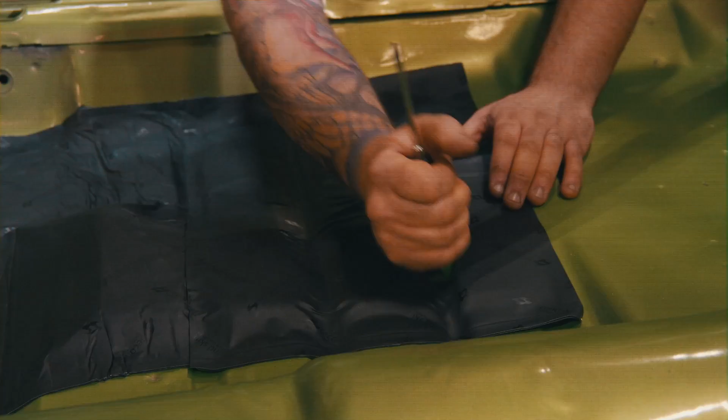With so many areas of the shop, it's been nice to watch the growth of the employees. We've really got a great team right now. Even though it takes a little bit to tune them up and get them thinking, once you do take that time, they know how important it is to me. So it's relaxing for me, and it's a peace of mind to know they're doing their job. That's going to help me get the cars done faster, which is going to make my clients happier and make us more efficient.

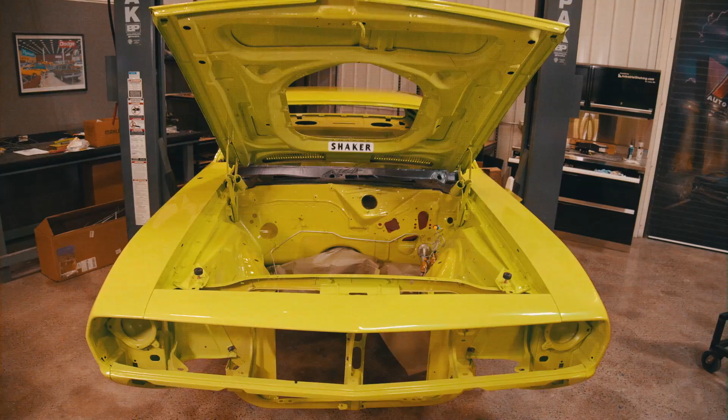On this episode, to compare the Barracuda Tribute with a real car, we've got our 1969 and a half Super Bee. One of the things this car requires is the accuracy and authenticity of Mopar.

They're coming to get you, Barbara. In Springfield, Oregon, dead Mopar muscle cars are coming back to life. Restored by Mopar master Mark Worman. I'm a liar and a fat mouth. His daughter, Alyssa Rose. Why would you do that? His painter, Will Scott. Got one dog. And his cousin, Dougie. Oh, hi, Mark.

Welcome back to Graveyard Carz.

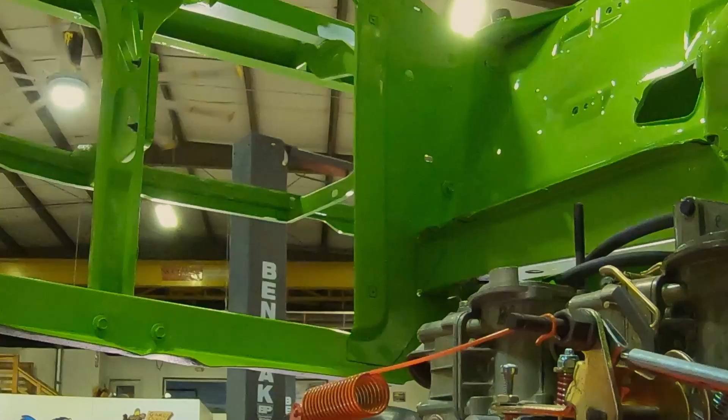In our 1970 Plymouth Barracuda Tribute car, we've already installed the drivetrain. I took some time before the drivetrain got installed to go over the specific details of what steps we go to make even a Tribute car look accurate to what a real BS23 V-code car would be. This is a 1970 440 six-pack HP engine with a Silver Sport 6-speed transmission and a Dana Moser rear axle. This engine is going in a '70 Cuda Tribute car.

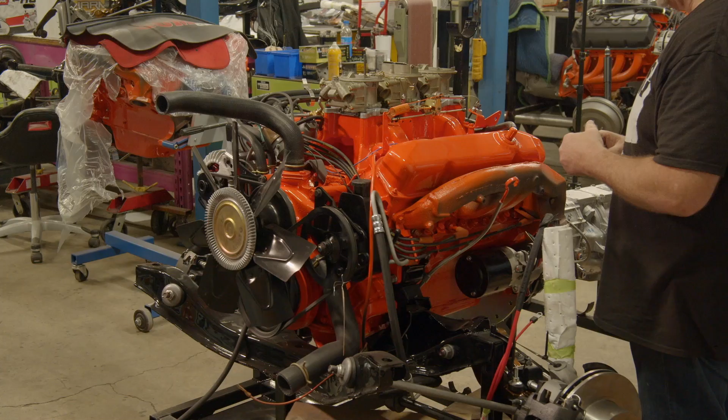This is a Graveyard Dreams car. People ask, if you're doing a Tribute car and it's not a real V-code car, how authentic do you get? How detailed do you get? How close do you really want it to be? Are you trying to fool anybody? Well, the answer is yes, I am trying to fool a lot of people, but not for any monetary advantage. The VIN in the windshield is going to tell you that this car started life as a 318. The fender tag is going to confirm that it's a 318. Everything else about the car is going to look like a '70 Cuda with a 440 six-barrel.

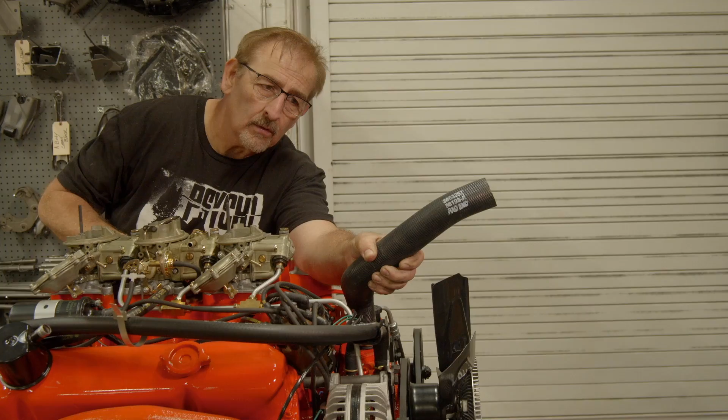So just to talk about that, upper radiator hose - that has the original part number, also the original texture, but not the one you get at your local parts store. This is a duplicate of the original. These are replicas of the spark plug wires with the date code on it. Original torsion clamps on the hoses, the 216 fan, which my friend Tony D'Agostino reproduces, and the date-coded clutch fan, which Tony also happens to make.

If you look at that right there, you'll see that there is a part number. Those are replicas of the original fan and power steering belts. That's the detail we go to. You open the hood, I don't want you to see anything except the way it should have started life if it was that particular car.

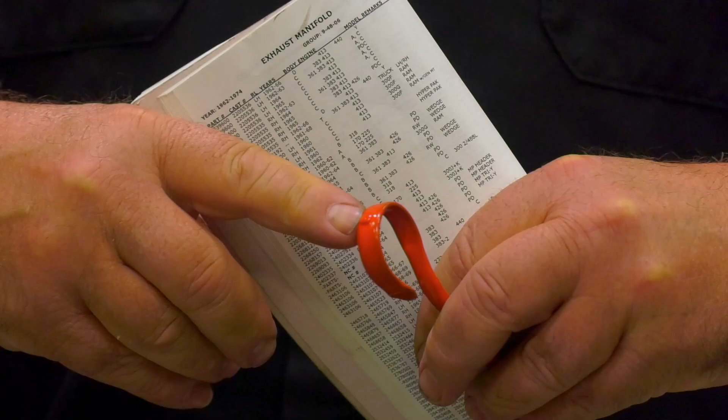You'll see that we use the natural finish on the dipstick tube with the painted dip. See a nice little dot right there? That means that's been dipped. PCV valve and grommet both get painted with the engine in Hemi orange. This is a correct throttle return bracket, throttle return spring, and throttle bracket for the 440 six-barrel manual transmission. Replica Holley 2-barrel carburetors with the correct screws.

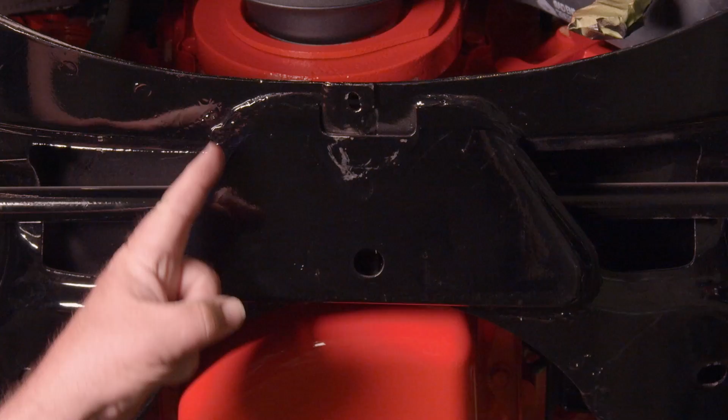They come with an 8mm hex head screw, the new reproductions. We get these from Classic Industries and replace them before we put the carburetors on. We have the lead here going to the six-pack idle stop, which I don't have yet - it's coming. You look at the K-member, that's an original K-member with the skid plate. The lower control arms have the simulated Cosmoline effect that we put on all of them.

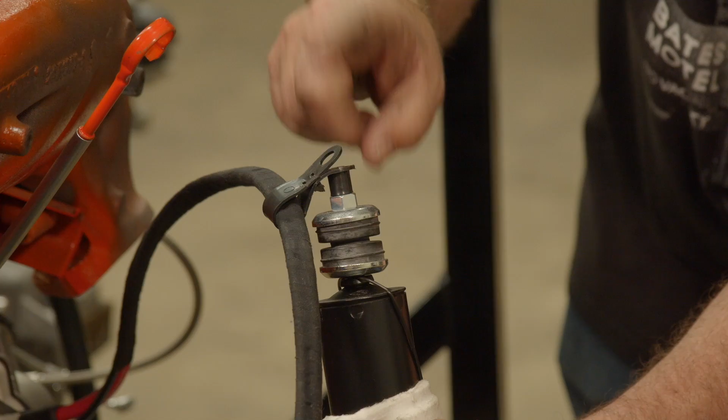Disc brakes, correct for a Super Track Pack car. This is going to have a 4:10 in it. It would be an A34 Super Track Pack. Replicas of the original black shocks with hardware, including the clip that holds a positive battery cable to the upper shock mounting bolt on the left-hand side of the car. Here you see an original sending unit for the rally instrument cluster. This is the correct original 6-barrel throttle cables that go on a '70 E-body with a 6-barrel on it.

The same thing applies on this half of the engine as it did on the other half. That is correct, original appearing—that's the name of the game. Whether your car's a G code for a 318 or a V code for a 440 6-barrel, when you pop that hood, if you're calling it a Tribute, or a clone like they used to call it, try to make it as accurate as possible. I guarantee you it's not a waste of money or time.

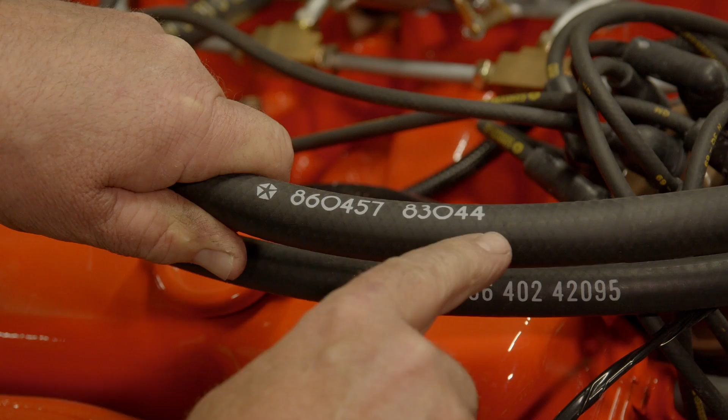Over here you see the heater hoses with the correct part numbers on them for the 1970 440 engine in a non-air conditioning E-body. Here on the coil you see it's got the original part number, the original color stamping, and the date code.

Original Gates hoses—this is the 11/32 black hose with the yellow writing on it. This one goes over to the PCV valve. This one right here goes over to the power brake booster. Because this car is a power disc brake car, we have to have that line going to it.

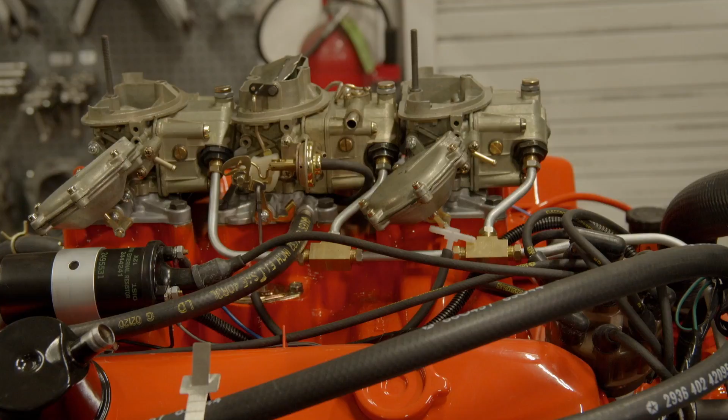From our friends at Inline Tube, these are the replicas of the original upper fuel lines that go into the 6-barrel carburetors. You could link it together any way you want, but if you want it to be right, that's the part you need on there.

Looking down here, you'll see the KV fuel line. This is the main incoming line, 3/8. The outgoing one is 5/16, but it also has KV on it. And this is the 1/4-inch fuel return line, and it goes back to the fuel tank. Then this is the fuel vapor separator.

So when you look at this engine, everything about it from a DNA standpoint is accurate for a 1970 Cuda 440 6-barrel. Originally, this engine would have had an 18-spline Hemi 4-speed behind it.

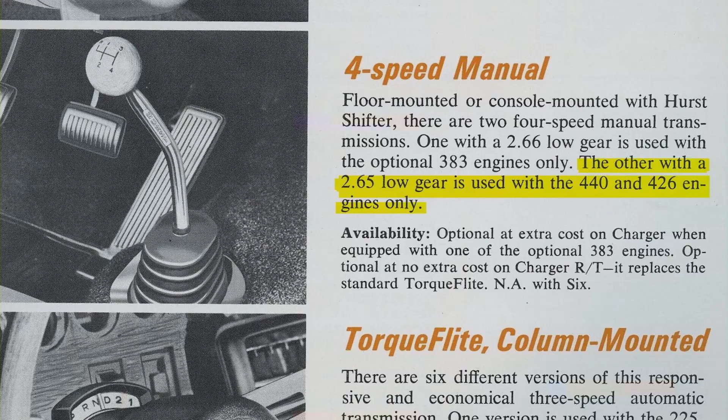Now, you've probably seen the transmission back here. The cool thing about the transmission is this is from Silver Sport—it's a 6-speed T56 Magnum transmission. You can buy this whole thing in a kit: scatter shield, clutch, flywheel, transmission, and you get the shifter.

Here's the coolest part of this particular transmission. Number one, it bolts right into your car—very few modifications to the floor. You do have to cut out a couple of small areas to be able to fit this transmission in there. We'll show you that when the time comes.

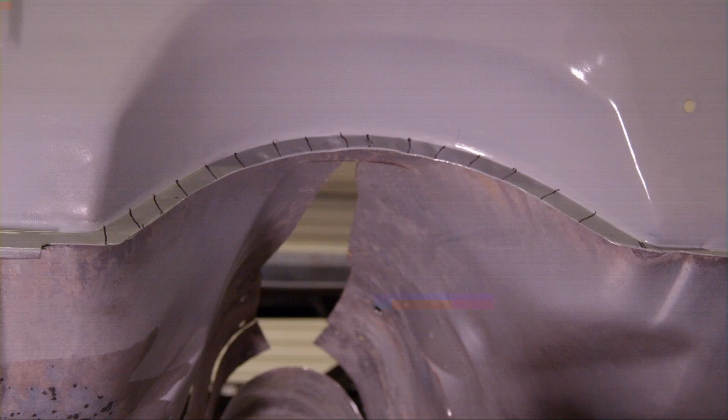It's this. This is the gold. Gold, Jerry, gold.

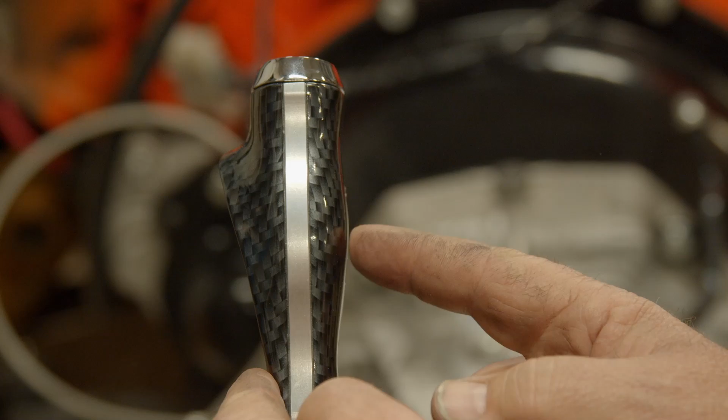Originally it had a pistol grip 4-speed with wood grain handles on it and a lens indicator on the top that would have a 4-speed pattern. This comes out exactly in the same position that a factory E-body 4-speed would come out—no modifications back there at all. They've modified its shifting area from here all the way back to here and off to the left because Mopars are off center. They've included carbon fiber, which isn't my cup of tea, but the folks that own the car happen to love it.

It's the lens on the top that I think is so cool—the same font, the same pattern, except that it's 6-speed.

So I grab that bad boy. First, look at the throw. Second, typically it's more like this—this is about 50% shorter throw. First, second, go into third, fourth, fifth, sixth. And then back to the neutral gate, over to the right and up is reverse.

That's just gonna make one nice driving car. So there you go—440 6-barrel Tribute with a 6-speed transmission, done the way Graveyard Carz does everything, the right way.

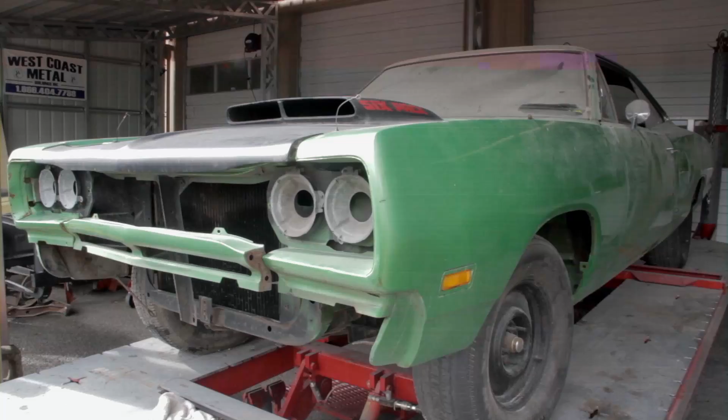So to compare the Barracuda Tribute with a real car, we've got our 1969.5 Super Bee. Now this car's been around a long time, and I'm sorry to say that. We've moved a couple of times, got a lot of things happen. The owner's been very patient with us, but it doesn't avoid the fact that we've had the car way too long, and it's time to finish it.

Connecting with ACC has allowed me to be able to get carpet sets for our cars. We were always able to get them, but the ones we're getting from them come in a great big flat box—this thing is not folded up. In this particular case, you open it up out of the box, you lay it in there, you use a quick steam across it just to make sure you hit all the contours, and all of a sudden you've got a factory OEM identical carpet set to what you had if you would have bought the car brand new.

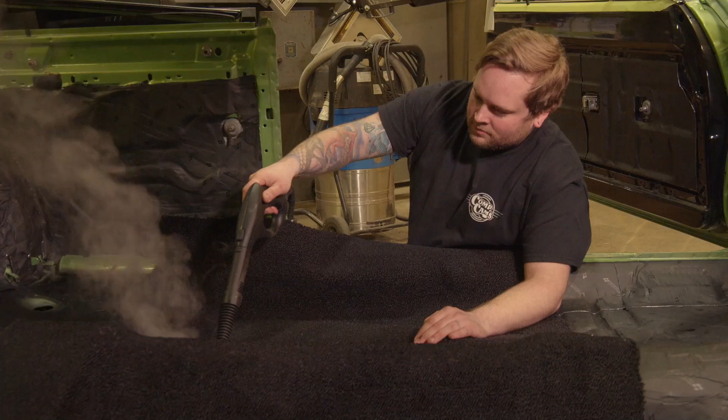They make these carpet sets a little bit long, which is smart, because sometimes you have to trim the end off, put it in there, and find out it's still too long, so you can keep trimming it. It's like hair - if you get a bad haircut, it's difficult to glue that hair back on.

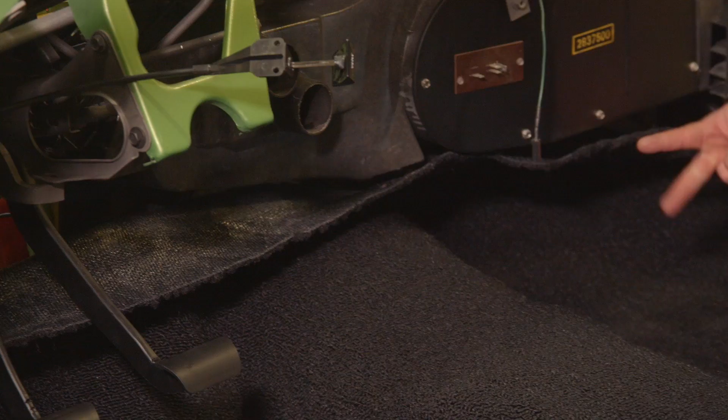You cut a board too short, you can't glue the wood back on. So in this case, they give you plenty and you just take your time and trim it. Between trimming it, steaming it, and fitting it, you should be able to make it look exactly the way it did, or better, when the car was new.

One of the most difficult cuts you need to make sure is perfectly lined up is actually where the shift mechanism comes through. You got to get that right because it's right in the center and nothing really covers that. You only get maybe about 1 inch of grace when cutting that for the shift boot to go over, but if you go anything further past that, you're calling them up and asking for a new carpet.

The carpet looks fantastic in there. Made all the cuts, got everything lined up, lays down super flat, and I just can't wait to move on to the next part.

So now that I got the carpet in, we can move on to the rest of the interior. We can actually get the dash in there, get the trim panels on the door, hopefully get some seats in there.

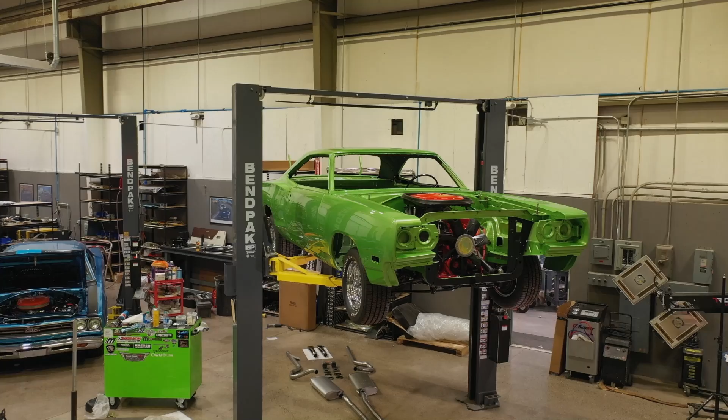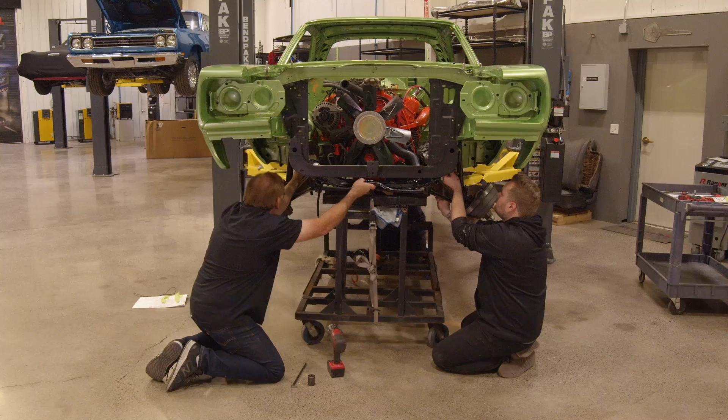We are getting ready to install the OEM exhaust system on our 69.5 A12 car. If you go back to the early seasons of Graveyard Carz, I did an inventory check on this car. We went around it from the very front to the very back, talking about the things that make it a real A12 car, some of the footprints we needed to record, so for times like this when we're putting it back together, we would have that documentation. It's a very unique package car and it deserves to be done right.

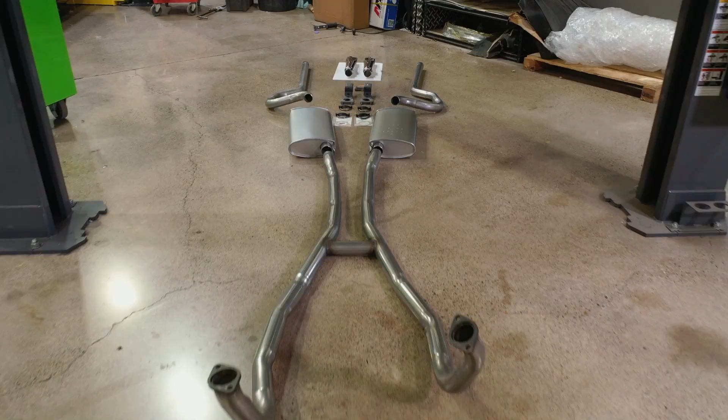So we reached out to ECS, the company that makes our decal kit. The exhaust system is what I fell in love with when I first saw them at SEMA a couple years ago. We've had discussions about the difference between the real righteous ones and the ones that are fine and affordable in other cases - but if you want a really righteous car, what makes this right? After learning that, I've decided to use those systems on our cars from here on out.

It's a nice looking pipe, right? Yeah. The ones we've used in the past, the cold rolled steel, which is the factory ones, they're also a nice looking pipe - right up to the point where you run them a few times and they get wet and they rust. So this system looks and appears completely OEM from the finish standpoint, but it's actually made of stainless steel.

The main thing that I think is so sexy on this system are all these bends - how they've made all of the duplicated exact bends where they're supposed to go. But the interesting part is the things they added that are cosmetic so it would appear OEM. So if you flip it over, first off, you see this seam? That's a factory weld seam, all the way down the pipe, just like the original cold rolled steel ones.

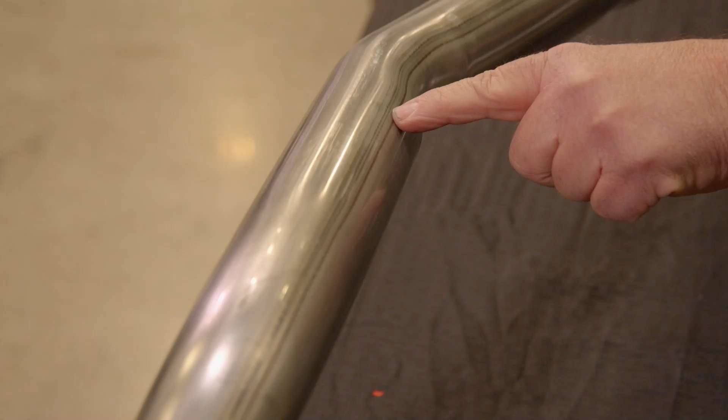Aluminized ones don't have that. So if you're doing an original one, you definitely want to make sure you have that seam so it looks right. Now this is the cool part - this flat spot you see on both sides, this is where it goes underneath the torsion bar cross member for clearance. Another key thing you don't see on a lot of systems is this flat spot right here - you know how the torsion bar comes right here, and on a lot of systems, this comes over, it doesn't have the sink in it, and so it'll hit that.

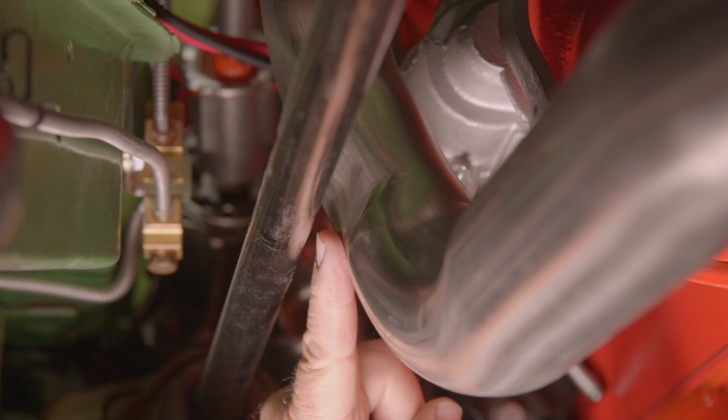The way the engine works on torque, you put it in gear and drop the clutch, it wants to walk up on the left, so it'll walk right up and smack into the torsion bar. This gives you an extra, probably almost an inch. So that line right there is 100% factory. That's really nice to have. Oh, it's great. It looks right and it actually serves the purpose.

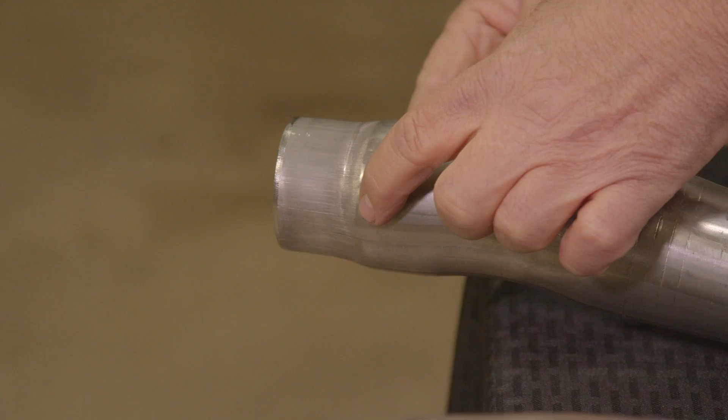You see these shoe marks right through here? These are all factory, even the factory ones have it from clamping it in the machine. The shank down, the really nice collapsed shank right there for the mufflers to go on. It's not cut or split or reduced, just pokey down. It's a factory system. It's just beautiful.

Yeah, let's put it in. Let's do it. So while we have used good exhaust systems in the past that work great, they're not licensed by Chrysler. They're not accurate enough to an original one that you could get a license and put a Pentastar on it. But on a car like that, that's why it's going on this one, and that's what that car deserves.

1966 was the first year for the Dodge Charger. Now originally, this car was supposed to be a turbine car. The turbine engine project failed, so the turbine Charger failed along with it. However, it was a great looking car, a great design, and Chrysler had a lot of money invested in it.

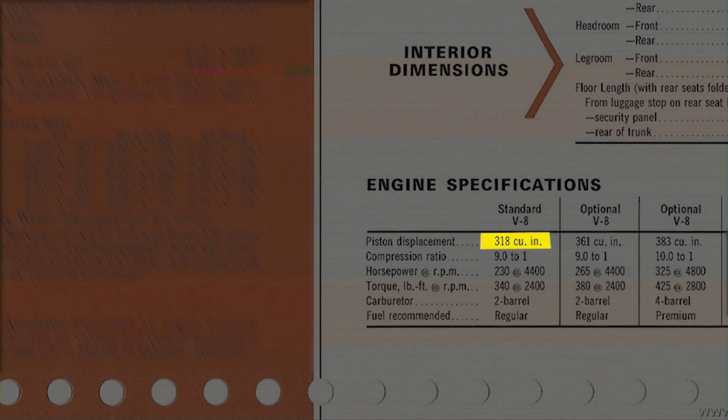They decided to continue to produce it with a conventional engine. The standard engine, the '66 Charger, was a 318. Optionally, you could get the 361 two-barrel, which also happened to be the last year for the 361. The 383 four-barrel was also optional in the '66 Charger. What other engine could you have gotten in this car? Was it the 440 Magnum, the 426 Hemi, or the 440 Six Pack? Think you know that answer? Stay tuned after the commercial break and we'll let you know how you did.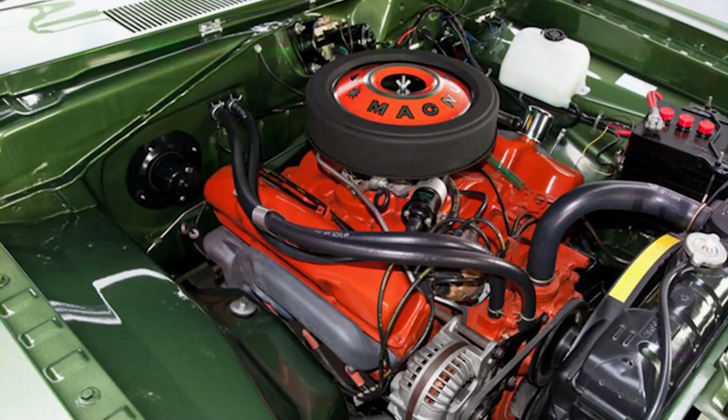The very first year for the Dodge Charger is 1966, like this one right here. The standard engine was a 318, we learned that. The 361 two-barrel was available in this year and model, as was the 383 four-barrel. What was the other engine available in this model? Was it the 440 Magnum, 426 Hemi, or 440 Six Pack? If you guessed 440 Six Pack, you're crazy. You're wrong and you're crazy, because 1969 and a half was the very first year for the A12 cars with the 440 Six Pack, 390 horsepower, 3 Holley two-barrel carburetors totaling 1,350 CFM.

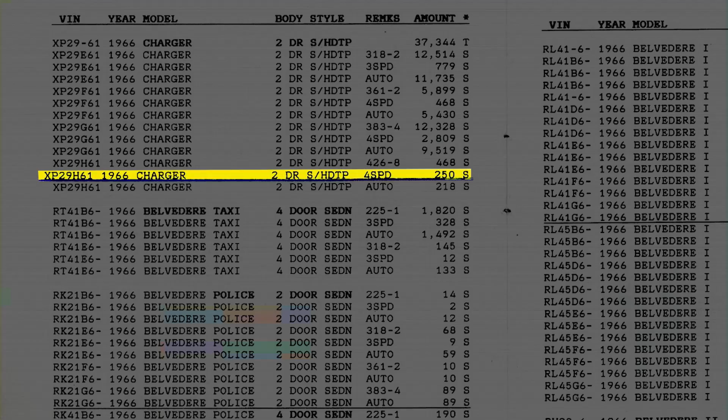If you said 426 Hemi, that was the other available engine. They only built 468 426 Hemi 1966 Dodge Chargers. Of those, like this one being a 4-speed, they made 250, only 218 automatics. So I can keep doing the number thing all day long, doesn't matter to me.

I got nothing but numbers rolling around. You see that movie, A Beautiful Mind, where the guy's standing in front of the board and all the numbers are going off and he's calculating it all? That's every day of my life. Like Terminator, the numbers are jumping up and down looking for matches. Now, the guy in Beautiful Mind, he had a nervous breakdown or something, right? I haven't had a nervous breakdown.

Okay, so we're ready to put the mufflers on. That means a little bit of hardware. Now, you've seen the other clamps that we used to use, they'd have a flange nut where the washer was built onto it, which works great, but it isn't correct. This is actually the correct setup for the hardware.

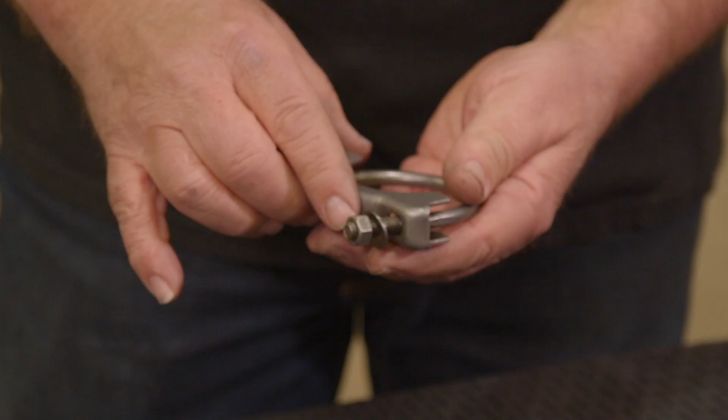Correct size, correct finish. You see they're oily? They're a natural finish from the factory. The ones that we get are zinc plated a lot of times, and that's not correct. This is actually correct, but they put the oil on to prevent it from rusting. These are what I'm in love with, natural finish, that's why they're oily. The correct band too, I believe a correct rubber band with the double sewing in it.

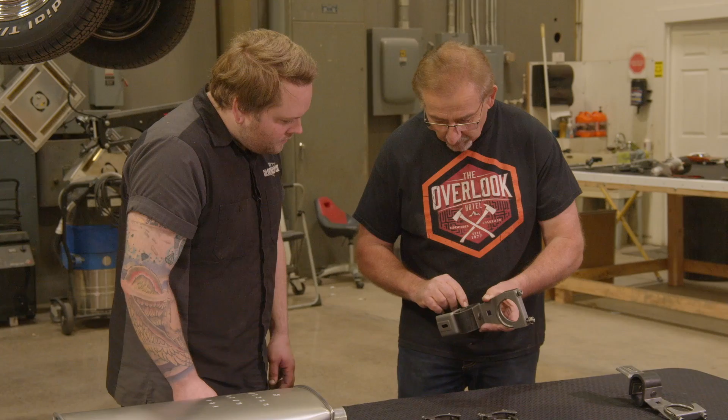But that stud, go look at an original one, that hollow rivet, that's all factory, where the generic ones that you get don't have any of that. I think it's just bolted on the generic ones. And see how this is stamped into it? Normally this is just flush and you bolt it on there. This is as close to an NOS part as you could get, just doesn't have a part number on it.

Nice, and then the mufflers, super cool. So these are double wrap. You've got your outer skin, and they actually have another skin underneath it.

That's what gives them the Hemi muffler deepness. You notice how a lot of mufflers we put on sound more tinny, like the MagnaFlow - great sound, but it's not a factory sound. This will offer you the factory sound.

These are the only ones licensed by Chrysler. That's why you only see the Pentastar stamp on these. So if you want to do it, you do it like that.

So you've got your vendor code, your date code. This would be the 27th day of '69, which is great because this is a spring car, so this is plenty - this is 2-3 months before the car was built.

Another vendor code, which internally means something to the people that made them originally. But these are built based on original. And the font - that's the other thing - that is identical.

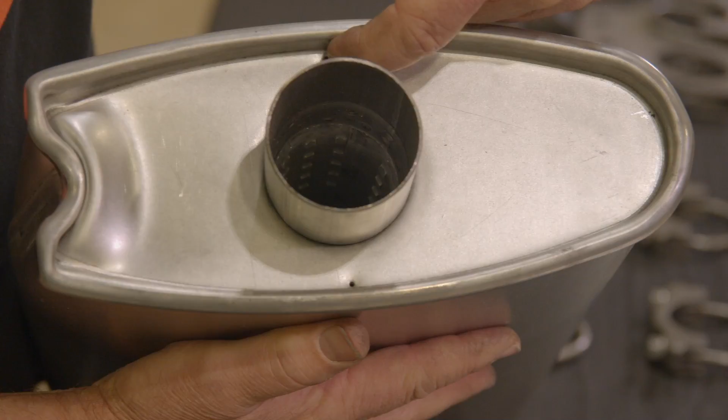But here's something nobody pays attention to - the aftermarket ones have one weep hole. This has two. That muffler is not specific to either side of the car.

So it could set this way, and it has to set a certain way on the left-hand side of the car. You could take that same muffler, flip it over, and put it on the other side. That's how it's intended to be - it's just that attention to detail is so important.

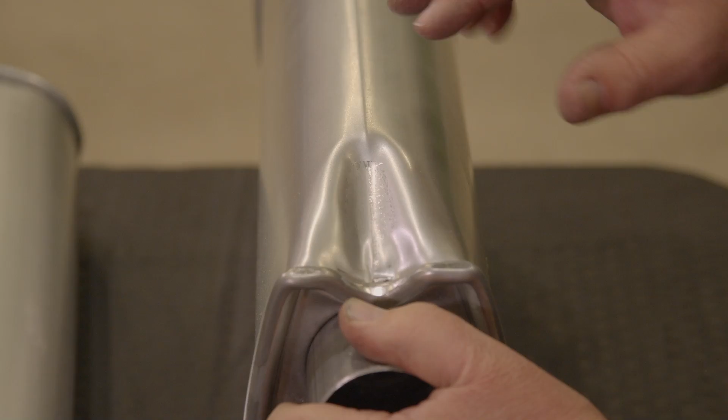That's really good, the indentions are beautiful. This is for the purpose of clearing the drive shaft during vibration, but these are all duplicates. However they did it, I don't know, but somebody studied it like a science, so you have all the indention marks, you have the correct muffler, you have the correct date codes, the Pentastar.

Everything about this is gonna look like an NOS system. The owner will be just thrilled. Looks great. So this system is a great example of what it would be like if you could go back in time and buy the entire system brand new from Chrysler.

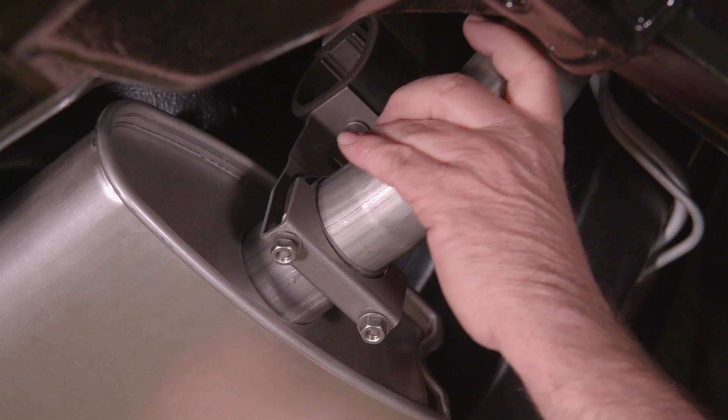At the end, it goes on easy. It looks exactly the way it should. And you know that if you go to a show, there's nobody at any show in any class that's gonna have a better system on their car.

The 1971 Cuda tribute car that I introduced recently is about to have its final metal work done on it. So you know which car this is - it's the one I bought because it was a real '71, but the only thing really salvageable, besides all the bolt-on stuff like very restorable headlights, taillights, grille, interior - that's invaluable stuff. So that's why we bought it.

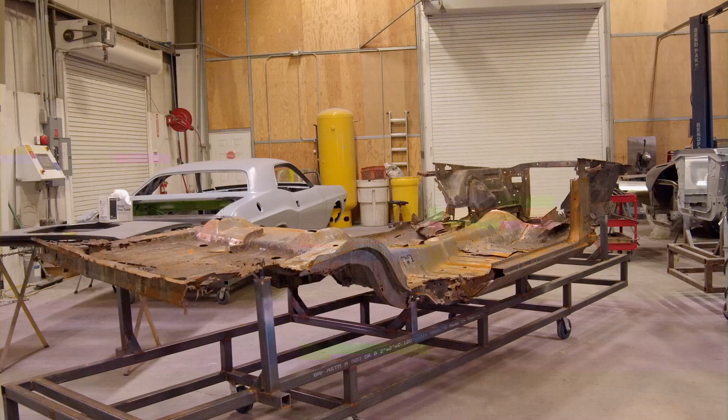Of course it would have been nice if the body was in mint condition, but a donor car like that in mint condition would be maybe $30,000, $40,000. They're hard to find. So that's why we built the one that we're building.

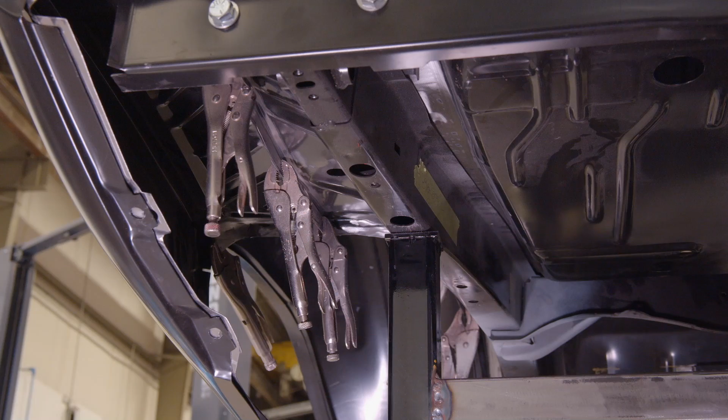So far, George and I, over the last few nights, have built out the entire body completely from one end to the other, but only screwed together and clamped together, not solid welded together. The reason we pre-built the car out was we want to know where everything goes before we start welding it in, because we're gonna film it and let you guys see it.

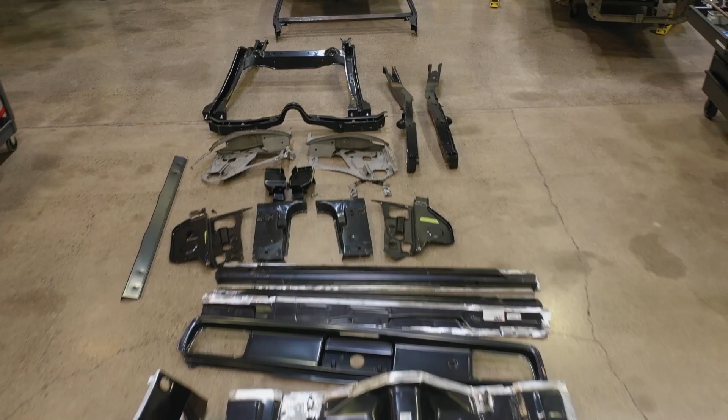We are going to walk through from the rear frame rails, front frame rails, transmission cross member. Then we're gonna do floors, extensions, trunk floor extensions, rear step wells, cowl, firewall, upper body, set the roof down on it. You're going to virtually see this car be built before your eyes.

Without a doubt, this is the most intricate build we've ever done. It's not the most high dollar build we've ever done. With cars becoming more and more obsolete, but Graveyard Carz wanting to stay in business for 30 more years, we've got to look for an alternative, and this could be the alternative.

If we can get a manufacturer like Auto Metal Direct to build some of the inner structure pieces for the roof that they're not building right now, we could build a car out of a catalog. So when we're done putting this car together, you're gonna see a completely built out tribute 1971 Hemi Cuda shaker hood car. Okay, so the very first step we've got to do in building out this entire car are some of the sub panels.

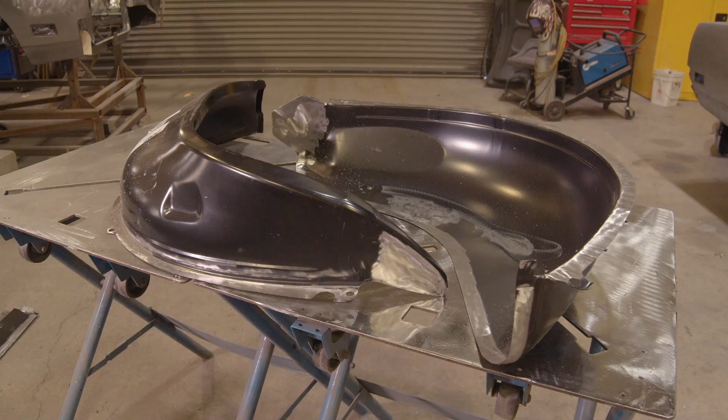So the wheelhouse, the inner and the outer, need to be spot welded together like the factory did. The inner and outer rockers also need to be spot welded. We know where they go, we've pre-fit everything, so I'm gonna help George. It's kind of a two-guy job, especially with the spot welder, holding it, making sure nothing moves. Once we do that, we can move over, start setting the frame down on the car, and put the rockers in place. Those are structural pieces you have to have in place before you can move forward.

This is the inner wheelhouse. This is the part right here on the back side of it. If this was in the car, the trunk floor would be between here and the other wheelhouse. So this is called the inner, and this is the outer wheelhouse. It's gonna marry up against it. This opening right here is exactly the opening of this 70 to 74 Cuda.

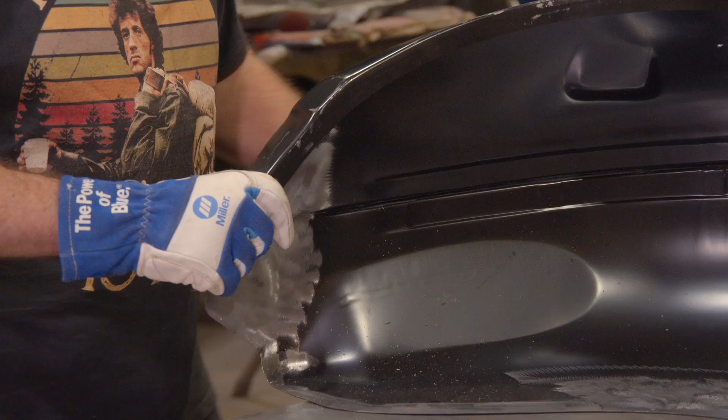So there are alignment holes that manufacturers put in, like these here. Throw them out the window, none of it matters. What you wanna do is make sure when you line it up, give you an idea. So in this case, you can see there's a hole right there. I'm gonna line it up with the hole underneath it. Doesn't have to be too tight, just in there.

Okay, and then down here on this end, this hole represents our other locating hole that we use. Remember, we've already set these into a car and in place, so we know we've already taken the time to make sure how everything fits, so we can just move forward with our spot welder. So George, I will line up that hole right in that range. Go ahead and set that one.

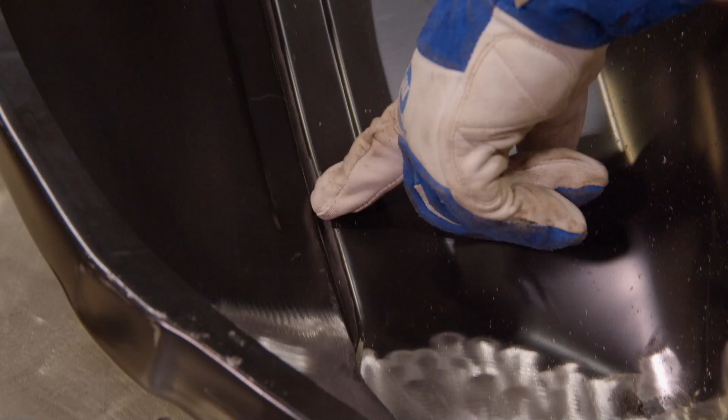Okay, now what we care about is in here. This plane and this plane should be right next to each other. It should be a nice flush finish all the way through there. Fantastic. Okay, so now we're ready to spot weld. We're almost done.

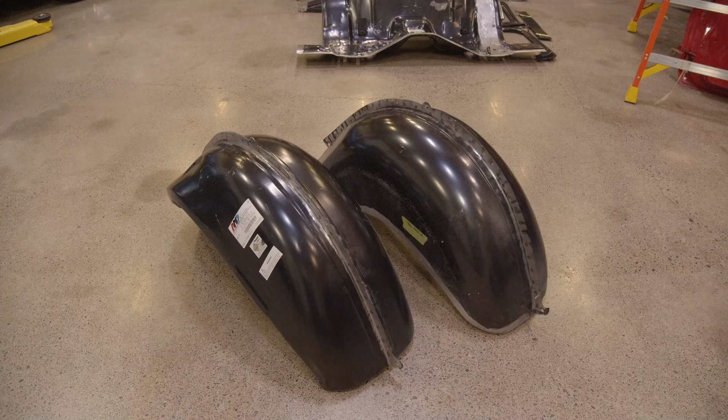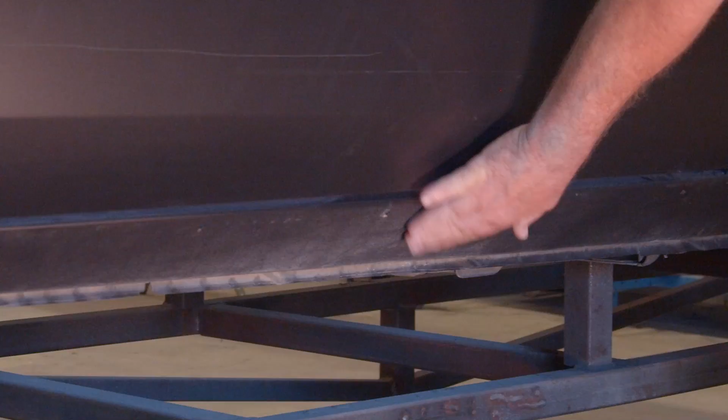Now we're going to weld together the inner and outer rocker panels. This is the right-hand outer rocker. See how it's shaped? This is the part you see from outside the car underneath the door, that's what we call a rocker panel. Right here, this is the sill area. So when you open your door, you see that nice sill plate that covers the edge of the carpeting? That's this area right through here. So it's called the outer rocker.

And this is the inner rocker. This is the reinforcement that, when married together, boxes it in. There's nothing better than boxed in steel, that's gonna give you all of the strength that you need. So go ahead and give me a clamp right there. We have our screw holes lined up. We're gonna do the top of it first, and then we'll put the bottom in place as we need to.

Again, it's really easy for these things to walk around on you and do this. So you just wanna make sure that these two lips are the same height all the way down. The other side isn't - as you can tell, it's sticking way up here on the outer rocker. We'll address that once this is welded into place.

All right, black marker, I'll give you some guidelines. Here we go. Put you one every couple of inches. I love to have too much, much better than not enough. Same thing applies - it's going to use a spot welder to marry these panels together, starting at the beginning.

Okay, we got the top half of it welded up. So here, you guys can see that this lip is sticking up. The outer rocker, which is closest to me, is above the inner rocker. Can you see that little lip right there? What we want to do is push this down so they're lined up perfectly before we do our spot welding on the bottom. There we go. Okay, you got it.

Okay, are those two coming together now? Yep, nice.

So all we've got to do now is the same thing. We're going to spot weld from this end to this end, about 2 inches apart. Once this is done, we can move it down to where the car is going to be put together at, along with the wheelhouses. He still has one more rocker to do, but you've seen how it goes.

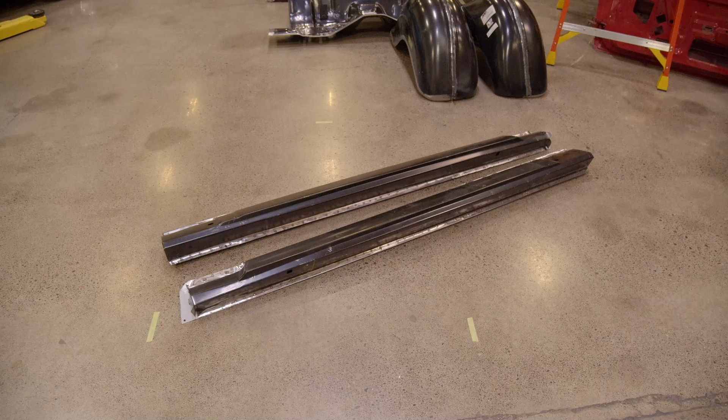So with that, I'm going to let you start spot welding. Thank you. All right, here to help you any way I can. You believe that, don't you? Oh, yeah.

All right, so we just got our dash assembly back for our '69.5 440 Six Pack, 4-speed, 4:10 Dana Super Bee. Same high bar is set, right? It has to look right. Instrument Specialties shipped it out last week and we just received it today. It's a beautiful piece of equipment, like all their stuff is. So I want to take a few minutes before we put the dash in and show Justin the intricate stuff you wouldn't even pay attention to unless somebody was pointing it out, so he knows the difference between just making something look good and doing it right.

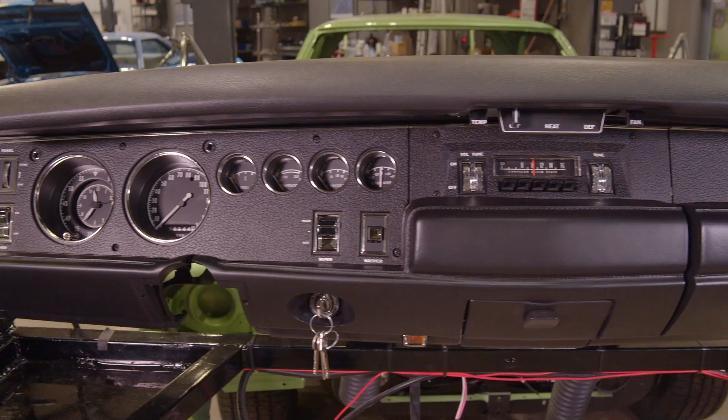This dash, if you look at the texture, one of the things I want to point out is how accurate that is. People spray these all the time and use all kinds of hokey products to try to duplicate the factory finish. This is original lacquer paint with suede, which is a discontinued paint and a discontinued toner. That's why Mike Mancini charges a little bit for it, because you can't get it anywhere else. This is the last of the stuff. I've even tried duplicating it myself, and it's hard - you can get it close, but never right.

Working in the dash area, I just want to point out this is not new reproduction parts from Classic Industries. There's nothing wrong with those, especially when the originals aren't available. But if you're a professional charging top dollar, you don't put reproduction parts on when you can re-chrome and replate - restore as much as you can. And that's what they've done.

Every knob you see, this button for the switch - these are all re-chromed originals. This is the original faceplate, re-chromed with hand-done lettering. Last time Mike was in here, he talked about how they used a cigarette butt filter, dabbing it with his finger, to apply the paint. He said he never even thought about it that way, but that's how they do it. Chrome here is new, the reset knob.

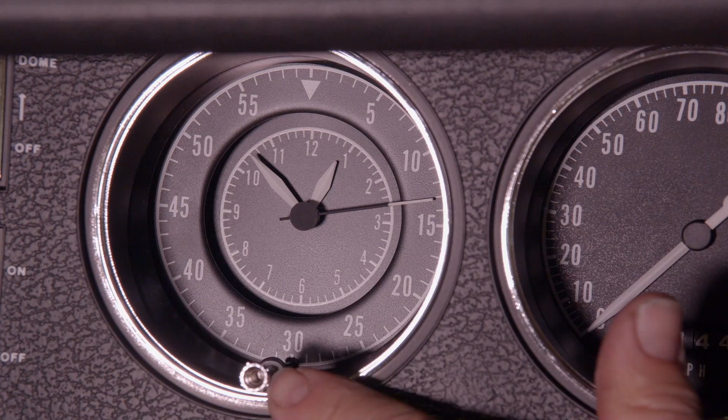Great time to check it. How do they get the re-chrome black like that? They chrome the whole thing, and then they black it out.

If you just look at the gauges, that's the original mileage right there. So he opted not to switch it back to zero - when his dad last drove the car, that was the mileage.

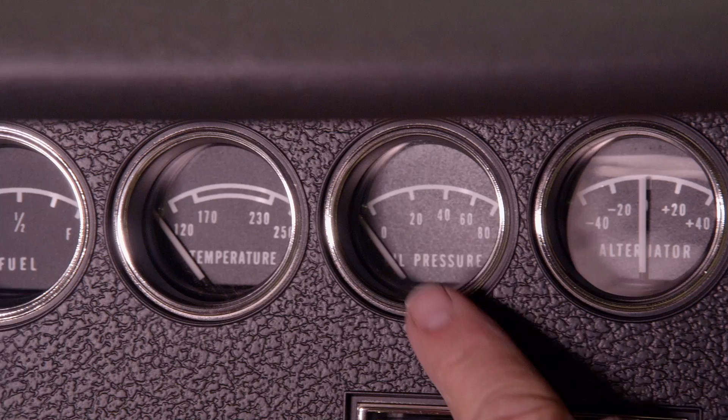I think that's such a great tribute to his father. It's a blessing that I got Mike Mancini back at Instrument Specialties to do our dash for us. When he restores these dash assemblies, the care to do it right and duplicate the factory is unprecedented. They don't put decals over the faces of these instruments - they do the original photochemical process. This is something he's the only guy in the country doing, but when it's done, it looks with the same finish, the same font, exactly the way those instrument panels were done back in the day. 50 years later, it gives you an exact appearance and lasts exactly the same as the old school ones did.

The radio knobs have been completely re-chromed, bezel re-chromed, hand lettered. Same thing with the temperature switches - he takes time to re-chrome all the original chrome work on it. He doesn't just buy new ones and put them on there - these are the original ones. And when these guys do it, it's always 100% accurate.

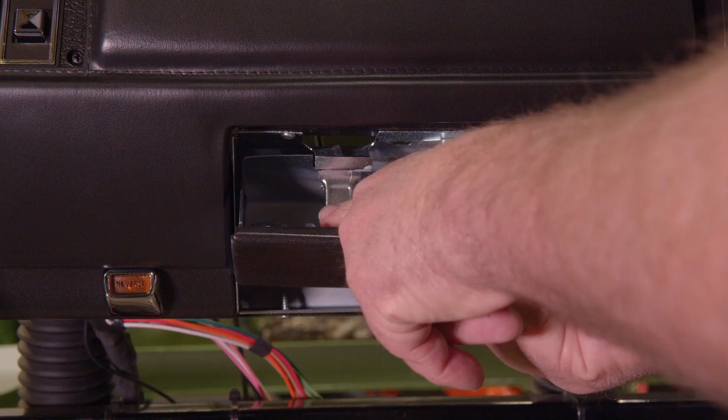If you look at the key, these are brand new blanks of the original - new old stock keys, made as an identical extra set. We had the originals, but these are new. The ashtray is the original receiver - it just happens to have been re-zinc plated, with the original correct texture on it, like the rest of the dash. The cigarette lighter is new old stock - notice the little ribs on the side there, that's an original lighter. It's amazing how much goes into one of these, but that's why they charge what they do.

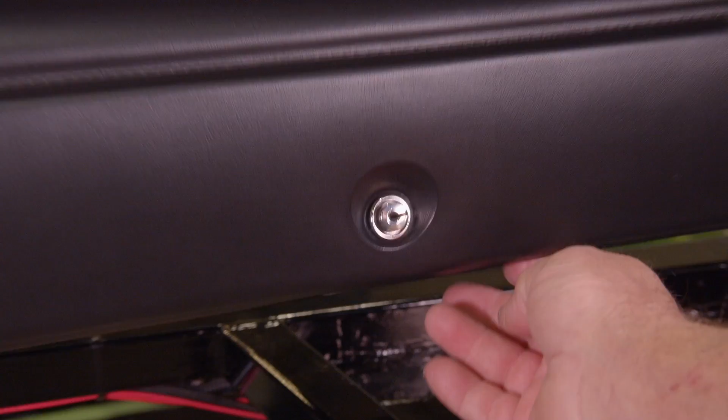Even right down to the knob for the glove box door - it's replated. I'm excited to see this go in the guy's car, it's gonna be excellent. He's been patient for us - awesome guy.

I can't wait till it's... hear that, Dave? He's an awesome guy, Dave's an awesome guy. He came out here in season 2 and hung out for a week. He packed his bicycle up in a knapsack, bolted it together when he got here, and rode it all over town. Guy's super healthy. He worked for... oh yeah.

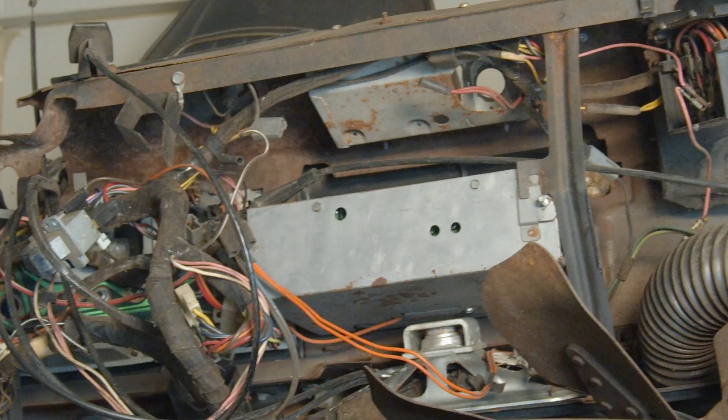Okay, just take a quick look through here. They use new reproduction wiring harnesses, which are great. Again, Classic Industries, that's just the ones anybody can get. You should always, if you can, do it, because the wiring harnesses on these cars are 50 years old, they're brittle, people have hacked into them before for a stereo or gauges. What you'd hate to do is spend $100,000 restoring a car and have this beautiful car burned to the ground over a $500 wiring harness.

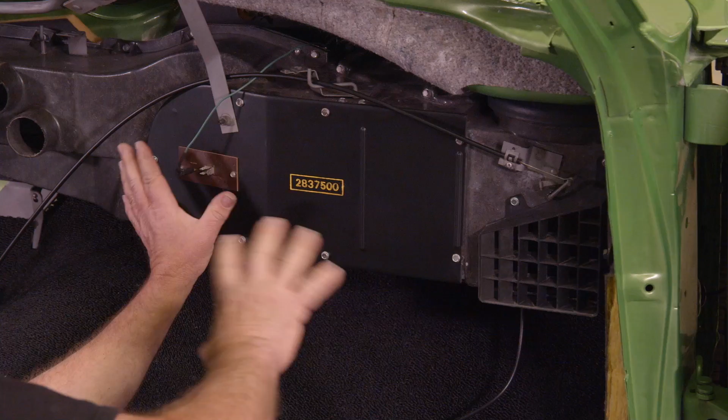Before we put the dash in, I wanted to show you a couple of provisions you have to have in place. This is the original heater box, just restored. We put in a new heater core, a new seal kit, new cables. We reproduced the original part number - if you look at the original part, you'll see that number was on there. This is a duplicate of that, so that's the attention to detail. If somebody crawls underneath your car at a show with a flashlight, they're gonna want to see that.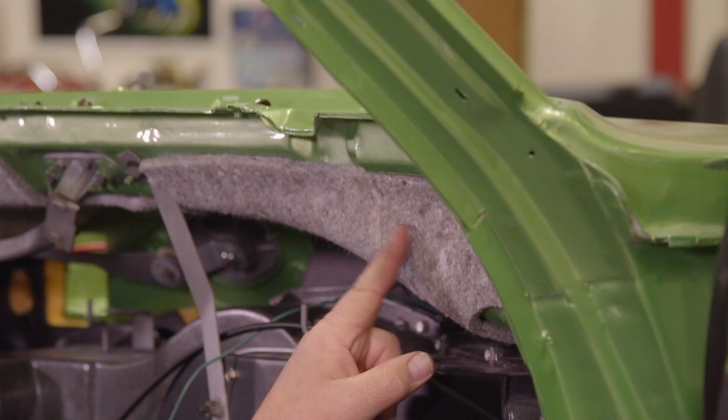The under dash installation, all cars got that, this car gets it. Kick panel installation, we want to add that. Look up in here, the wiper transmission has been blasted and clear coated, so it's safe, it's not gonna rust. All the joints have been greased and lubed. Clutch and brake pedal assembly - you see the black mark, and then the natural finish from there up. All of that is restored, in place, and ready for the dash to go in. Make sure you have that before you put your dash in, or you'll be taking it back out later.

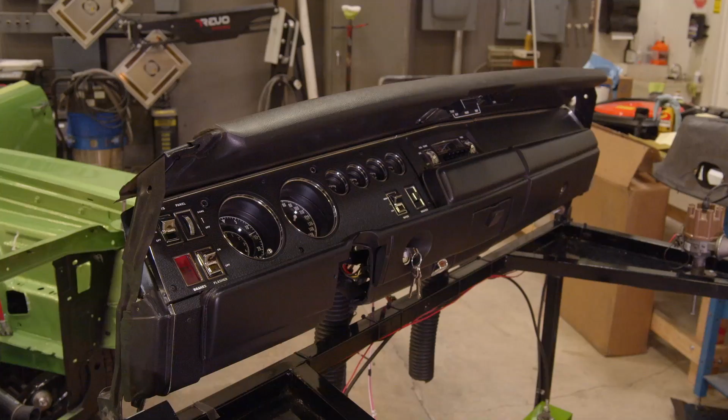Since you're younger than me, I'm gonna let you crawl through. Okay, that sounds good. I always make the young guy do that. I could do it, I just look pretty ugly doing it. I think we all would. Well, the older you get, the uglier you get doing it. Royal tries to do it like it's no problem at all, but you can tell by the look on his face, it's a problem. Real struggling, huh? Yeah, but I give him credit for trying.

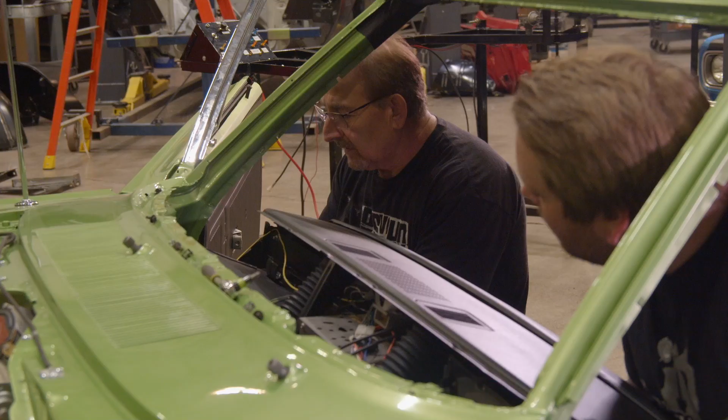All right, God, beautiful. All of a sudden, what, 6 bolts, 7 bolts, and it's a car again? Yep. Take your time, I'll let you hook your side first. Okay, let me get my hand out. Okay, I'm there, you on there? Okay, yep, I'll just sit here and hold it up for you. Start making connections.

This is my favorite part of the job right here, just hold it up. Laying down on the job, huh? Hold it up, holding it up. Hold the line, holding the line. Sometimes when it comes to stuff like this, you just need an extra set of hands. This thing, what do you think this weighs, if you had to guess? 50? Yeah, probably 50, 60 pounds. It's not bad, it's just awkward. Yeah, I've done one of these by myself before, it's not fun.

Hello, GoPro. I'm just waving at a GoPro back there. This is what I do when you're in your 13th season of Graveyard Carz, you can acknowledge the camera. I don't care, it's a camera, do what I want. People say I'm very much like David Brent or Michael Scott, whatever, you know. I just do what I do, right? Like Popeye the Sailor Man - I yam what I yam, and that's all that I yam.

Let me get this speedo cable on. All right. Okay, I'll get this first one in here and we can... Okay. All right, there we go. There we go, yo.

And that's how we put a dash in a 69.5 Super Bee. So we have our dashboard now installed. Everything looks great, connections are all made, able to roll it up into place and bolt it down. Now we can just move on building out the rest of the interior - get the steering column installed, start building out the back seat area, door trim panels, front seats. We're ready to move forward with the rest of the assembly on Johnson's 69.5 Super Bee.

The 1970 Plymouth Superbird was born out of necessity. In order for Plymouth to run their new car at NASCAR in 1970, they had to build one street version for every 2 dealerships in the country. There were around 4,000 dealerships at that time, so around 2,000 cars had to be built.

Between 1920 and 1935 Superbirds were built. There is no conclusive answer.

True or false? All Superbirds came with a 426 Hemi and a 4-speed transmission. If you think you know the answer, stay tuned after the break. We'll let you know how you did.

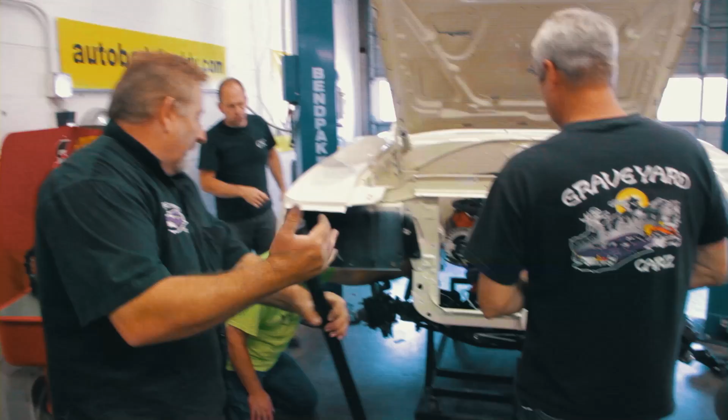My question was, of the street versions of the Superbird that were built, whether it was 1920 or 1935 or somewhere in between, true or false, they were all 426 Hemi 4-speed cars. If you said false, you were absolutely right.

The Superbird standard engine was a 375 horsepower 440 Super Commando, available with both a 4-speed and an automatic transmission. The first optional engine was the 440 6-barrel V code, also available with a 4-speed and an automatic transmission. The legendary R code 426 Hemi was available in the 1970 Plymouth Superbird.

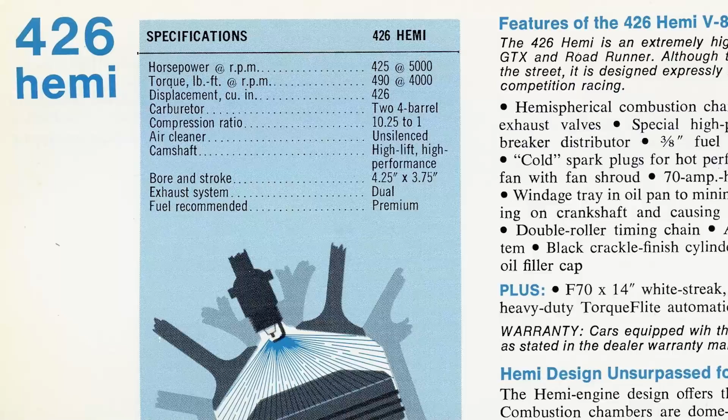Of the 4-speeds, 58 were built. Of the automatics, 77 were built, making a Hemi option Superbird, especially with a 4-speed, one of only 58, could very easily be a 7-figure car in today's world.

All right, so I'm gonna go get George and we're gonna begin the final assembly of the '71 Hemi Cuda Tribute car. We talked about what dire straits this car was in when I got it, but the most valuable thing was it was a complete car, and how valuable that roof inner structure stuff is because nobody makes it.

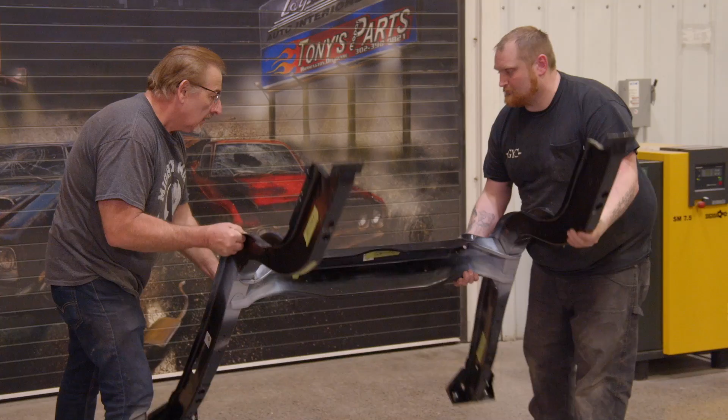Right here is the rear shock crossmember. So to give you an example, put it into perspective, let's turn it over, George. If this is in the back of the car, your rear shocks come right up through here and this bolt locates them into place. This is called a rear shock crossmember.

It does not come on the frame rails already, I had to put that on there. But the reason I like to do it now, while it's all apart, is we have accessibility to it. Here you can see I have really nice welds all through here. You couldn't do that normally speaking when it's on the car.

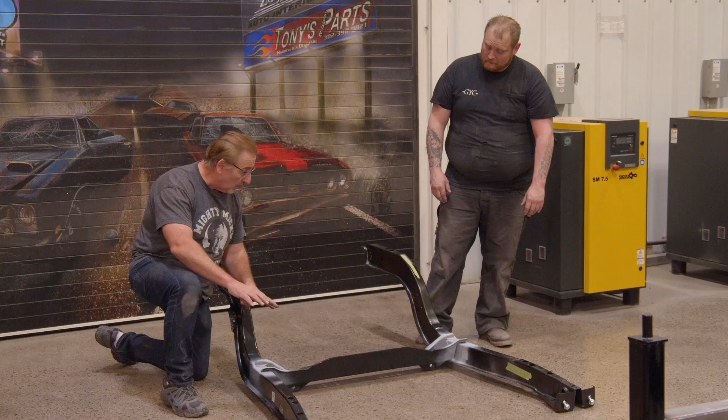You can't even tell that we welded it in these areas right here. We also did a measurement to make sure that they were perfect where they're supposed to go. So this subassembly is ready to install.

This is a Graveyard Dreams car. It's hard to find '71 Barracuda bodies. That's why we went to such great lengths on this one, but you're gonna learn some really neat stuff that you've never seen before on Graveyard Carz.

If you wanna grab the trunk pan, we'll get ready to set it up here in a minute. Sounds good. This is a weld-through primer like we've mentioned before, it'll put a seal around our welds. All right, go ahead and throw that pan up there, we'll give you a hand. All right, there you go.

These are the areas that we're going to be spot welding onto the frame rails. So we want to put some weld-through primer on that.

They've already been stripped. You got a tape measure handy? We can do a measure off this rail right here. Boy, it's really close right there.

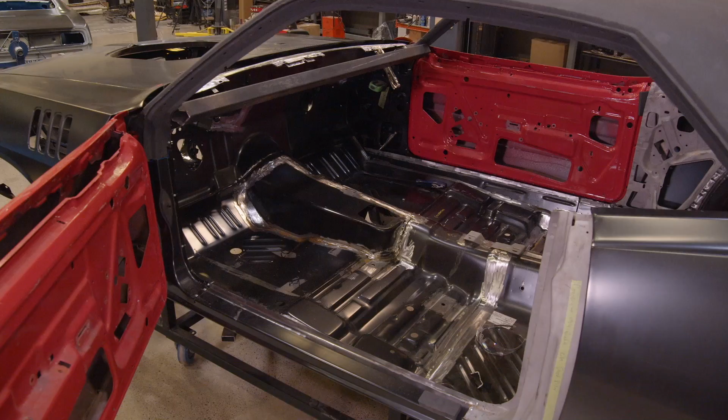George and I have taken that car and we've actually pre-built it out. Everything in place to look like a real-life car. Everything was screwed together, which gives us the ability to look at it and make sure it's geometrically square and true. But also we have those locator holes now that it's time to go back together for final, because now's the time when this car gets welded up.

I believe that is it right there. Those holes are lined up nicely. That's lined up.

So right now we have the trunk pan sitting in space where it's supposed to go. We're gonna spot weld this in a couple of areas to the frame rails, double check it with a cross measure one more time, and then we can spot weld it almost all the way forward. We'll stop around here because we still have to put the other panel over the top of it, the under seat pan. But it's going really well.

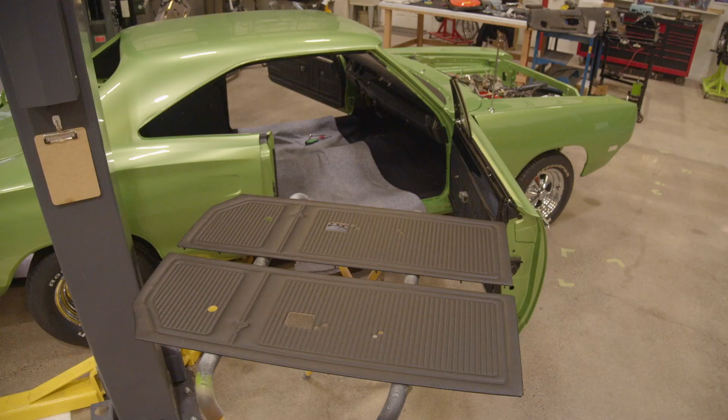So today I'm getting ready to install and build out the quarter trim panels and the door panels on the 69.5 Super B. Our interior trim panel, in fact all of our upholstery on the inside other than the carpet set, came from Classic Industries, and these are exact replicas of the originals.

So before you put one of these on, you want to make sure that you actually have your retaining clips in here for the screws that hold your armrest in place. So check if you got those in there.

The interior door trim panels are beautiful. They're heat pressed just like the factory ones are, so when you stand back and look at them, they look the way they're supposed to, except they're not 50 years old.

You get this put on. This just slides up right into the beauty trim. Just want to be careful you don't snag these corners or anything. If you snag them, you got to pull it off and readjust, or you could end up tearing the material, so start kind of lining up your clips.

Let's start with the top. Move on to the front. Press that up into place. You can kind of feel through to see if they're lining up together.

Another thing too is make sure you press right where that clip is. You can kind of feel it behind. If you don't, it can push through and kind of protrude through your trim panel.

There we go. What we go to next is our armrest.

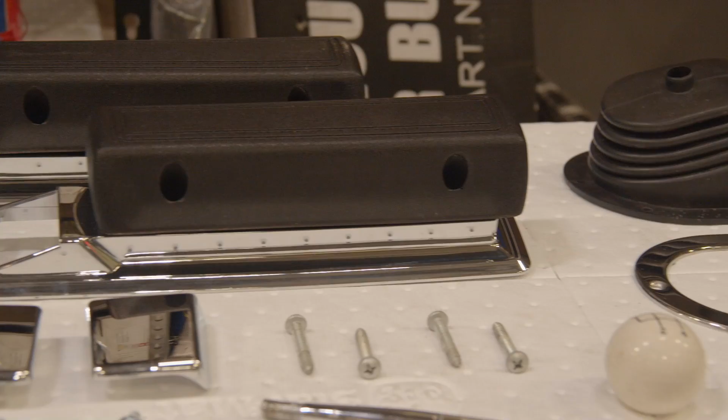Just want to make sure that you have this level with the door. Once it's lined up, go ahead and do your final tight. Then you can move on to the door handle.

This is the first Super B I've gotten to work on. Gotta say, I really like these cars. Just got their door handle on there.

Now we can set on our window crank handle. An interesting little note, I've been to car shows since I was 15 years old. Back then I didn't pay attention, but I sure do now, and that is the location of the window cranks. You'd think a window crank can be put on anywhere, 360 degrees, just wherever you want it, wherever it feels good.

Well, there are actually factory positions for it. So when you're sitting in the passenger seat and you roll that window up, that thing should stop at 7 o'clock. If you were looking at a clock face, wherever 7 o'clock is, that's where that handle should stop. 5 o'clock on the driver's side, because you're on the opposite side of the clock, right?

Those are the important little details when they go to a show, whether the windows are up or down, you have to have those cranks in the right position.

So I got the door trim panels on, I got the armrests, the door handle, and the window crank levers. Everything went on really nice. It's probably the best one so far. Everything just fell right into place. It's really awesome to be able to work on something that just goes together so smooth.